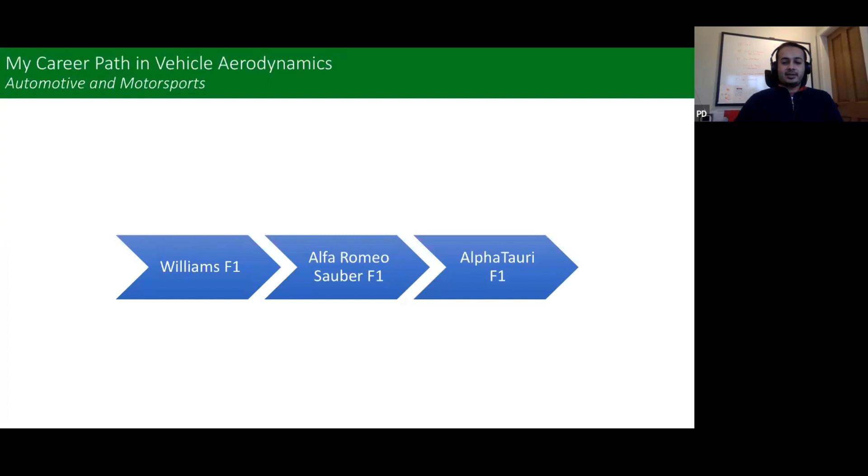That was one of the things we said we'd do. So my career path - I've spent about 10 years in Formula One, specifically at Williams, Alfa Romeo in Switzerland, and AlphaTauri in the UK. But before F1, I spent a good few years in the automotive industry. I worked at McLaren, at Williams Advanced Engineering, but my career really started at a CFD company called Exa in the US.

Just a little anecdote: none of this would have happened if not for a bit of a lucky break. As a lot of students find themselves in this situation, I finished my master's in the US and was looking for a job. Visa sponsorship is an issue everywhere, and under pressure to find a job, I almost accepted a job from a pump manufacturing company. So that's the road I would have gone down.

But the day before I accepted that job, Exa, a CFD software company, called me. They said, we'd like to interview you. I said, I'm just about to accept a job. They said, well, if you haven't signed anything, just come tomorrow. So they flew me out to Boston, interviewed me all day, and in the evening the hiring manager said, don't accept that offer, we'll send you an offer. That was my sliding doors moment.

It opened the door to this kind of career, which you see on the screen. It could have been something quite different. So I'm forever grateful to my mentor at Exa, who gave me my first job. I learned a lot there - it was a CFD company where I started off. I'll show you a few things at various points in my career.

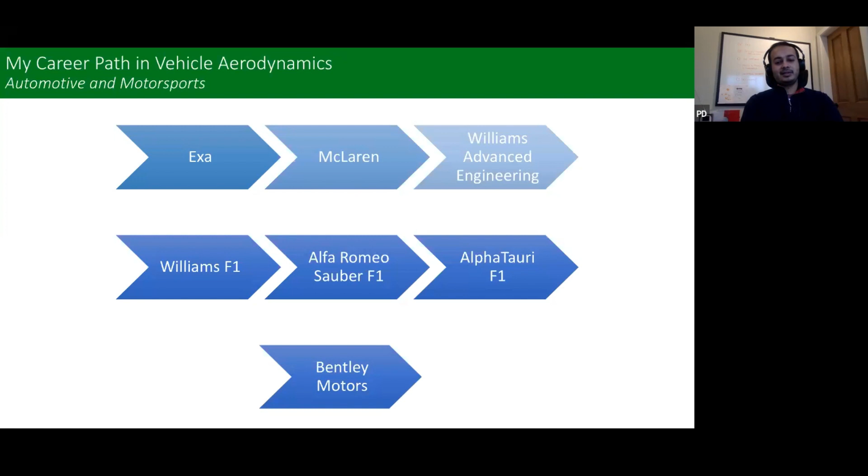Just looking at a few interesting things throughout my career. When I was at the CFD company, I was very luckily sent to work on NASCAR. I used to go down to North Carolina - we worked with the Toyota Camry at the time, and I helped develop their 2007 car. That was my introduction to motorsports. It was an interesting life, NASCAR, being with the team in North Carolina, and it gave me a bit of an appetizer - being in the wind tunnel there, being at the racetrack, and seeing how the world of motorsports worked.

And then I went to Williams Advanced Engineering, worked on a Jaguar C-X75. Williams Advanced Engineering was contracted to develop this car with Jaguar, and it was a very cool project because initially it was supposed to have tiny jet engines in the back. That was the concept, but it later was slightly watered down and became a hybrid car with very powerful motors and engines. But it was again a very nice car.

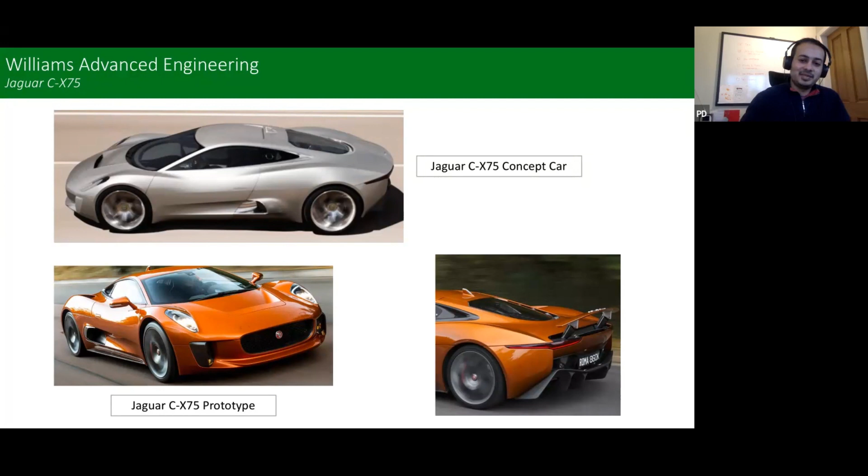It never made it into production, but it did have its 15 minutes of fame, playing the villain in a Bond movie. So the Jaguar C-X75 never saw production, but the prototypes were used in Spectre, in a chase scene in Rome. That's its 15 minutes of fame. If you look it up, you'll see a 4-minute chase sequence where the Jaguar C-X75 is driven by the villain, chasing James Bond in an Aston Martin.

But yeah, the moment that I talked about earlier, that I really wanted to get into F1, happened when I was at McLaren, and Lewis Hamilton won his first championship.

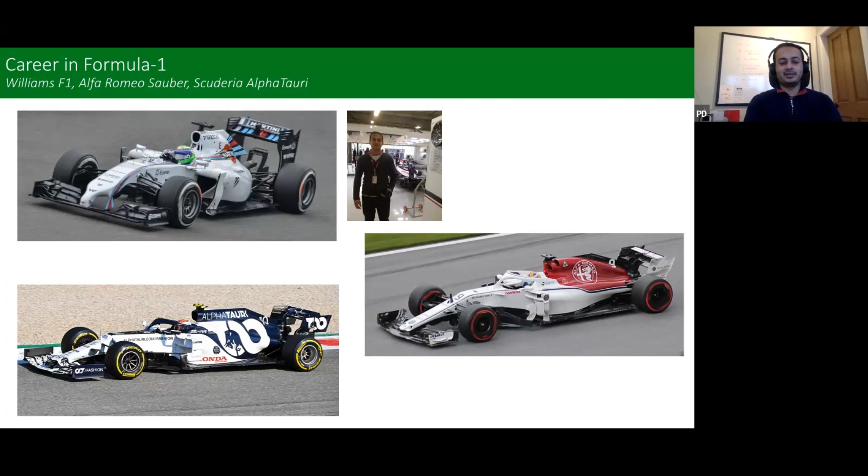That role was responsible for the development of the front of the car. After a couple of years there, I came back to the UK and worked at AlphaTauri. That was my F1 career before I moved out again, and now I'm back in automotive. I work at Bentley Motors now on those kind of cool cars.

Well, that's kind of laid the foundation as to who you are and what you've done, and I think we are all excited to hear about you demystifying how F1 teams, including me, to be honest, tend to simulate racetrack conditions in wind tunnels. So let's get into it.

I know you have 4 case studies to show. We'll go over these, and the methodology we'll focus on is looking at them from a very high level, because once we start talking aero, we just go on about it. We'll try to keep some time for questions, because I assume there'll be lots. So as you're preparing your questions, please try to refer to which particular case study you're asking about, depending on the 4 case studies. This way you also have to pay attention to what you're asking for. Let's jump into it.

As Shubham mentioned, we will reserve some time for your questions. I've seen hands popping up already, and maybe the career path is also interesting, you can ask questions about that too. It doesn't have to be only on the technical presentation. So just reserve that for towards the end, and we'll get into all of that.

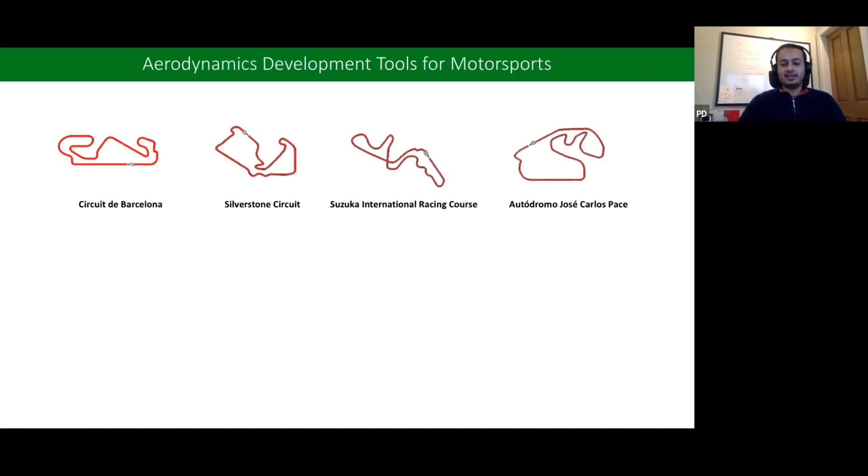So we'll talk about aerodynamics development tools that engineers have at their disposal to make the race car faster. I've just taken a few examples of race circuits, some of my favorites: Barcelona, Silverstone, Suzuka, and Brazil. It's just an example. What do we see? What's the common theme? You've got straights, you've got corners, and those corners are all taken at different speeds. Some are very slow, some are very high speed, and some are in between.

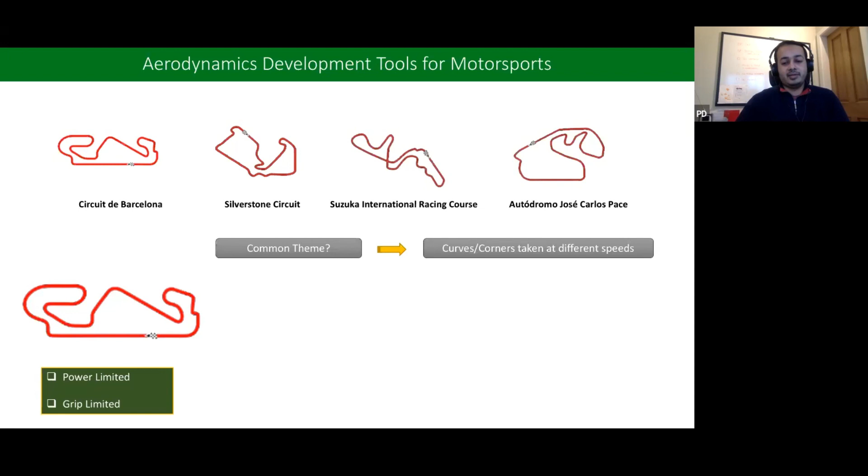So let's just isolate the Barcelona circuit. It's almost a reference circuit for all the teams. If the car does well there, that means it's a well-rounded car. You see parts of the circuit where the car is power limited, generally the straights. And you see the rest of the circuit where it's grip limited, meaning if you want to go faster, you need more grip. So the limitation is grip, and those are generally the corners.

So the grip limited parts of the track are the corners. The faster lap time is achieved by carrying more speed through corners, and what helps you achieve that is more grip through the tires. The more grip through the tires acting on the road, the more speed you can carry into and through the corner. And what gives you more grip? Aero gives you more grip, apart from all the tire characteristics. If you assume everything else is equal, aerodynamics and downforce will give you more grip acting on the tires, and that's how you carry more speed and achieve a faster lap time.

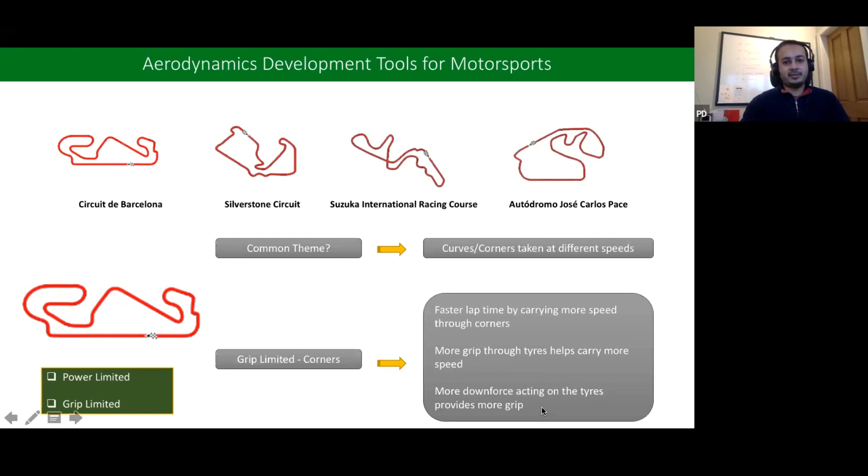Let's look at Silverstone, one of my very favorite tracks. It also throws up a really interesting race most of the time because of the weather in the UK. If you just look at this track, you can see all the different speed corners I was referring to - high speed corners, medium speed corners, low speed corners. They're all at different speeds that the car can take them at.

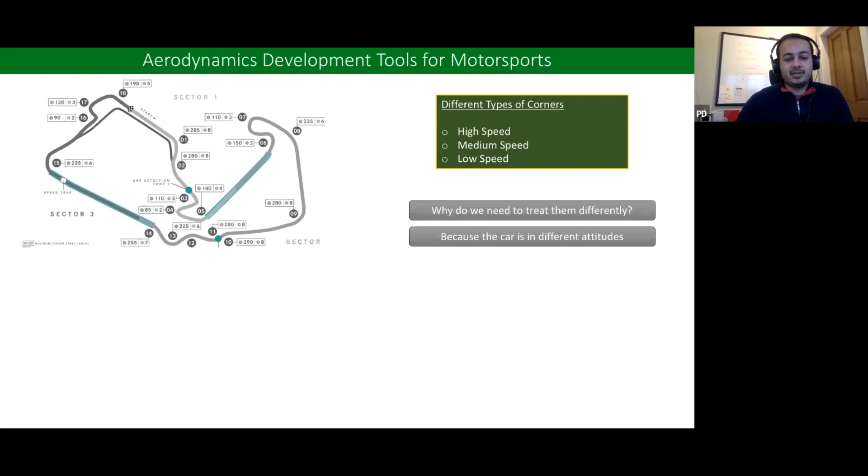Why do we need to treat all of these corners differently? It's because the car, as it goes through different speed corners, is in a different attitude because of the downforce acting on the car, the steering input demanded to navigate that corner, and also the ride height at that particular corner. So different speed corners put the car in a different attitude, which is why we need to treat them differently.

Let's quickly look at the British Grand Prix 2020 as a rough example. This is corner 9, a quite high speed corner.

That was a high speed corner, with drivers taking it at 300 kilometers per hour. Now let's look at a very low speed corner, corner 4, a tight one here. Silverstone's guideline speed for this corner is 85, but of course Formula 1 cars go faster. Verstappen is taking it at 118, and one of the slower ones was Latifi at 104.

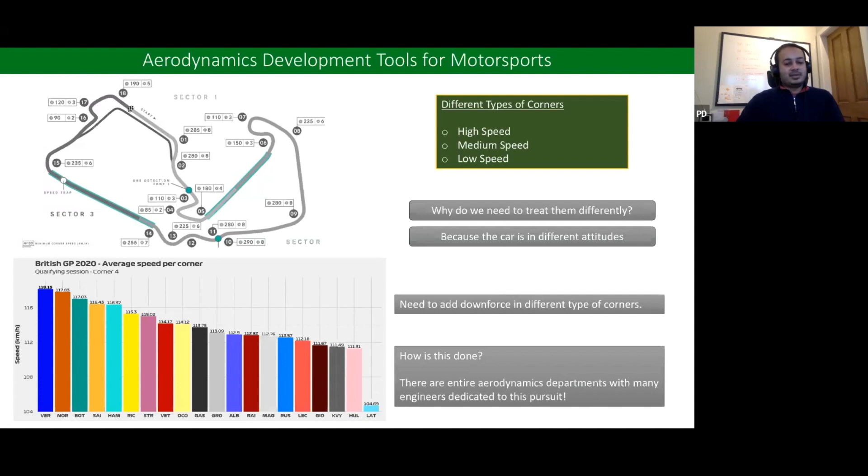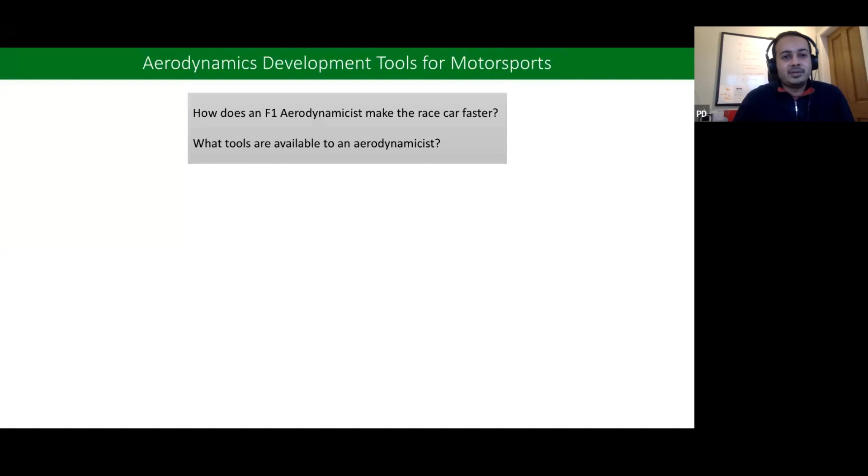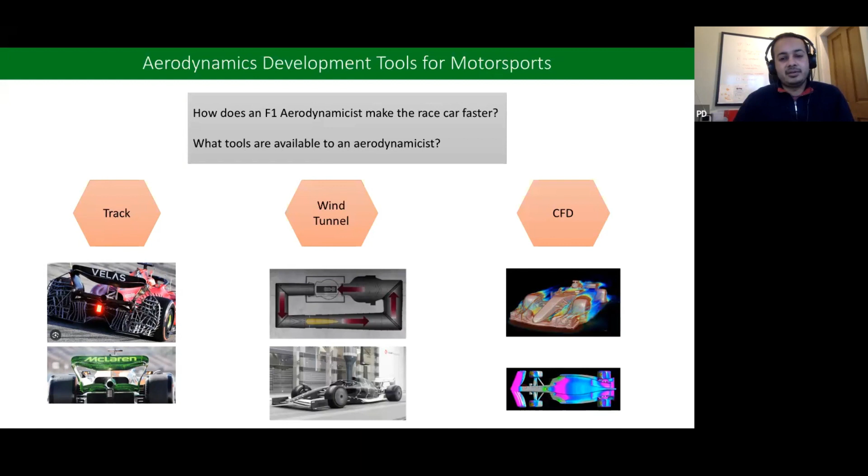So let's ask ourselves, how does an F1 aerodynamicist make the race car faster? What tools are available to an aerodynamics engineer? You've got the track, which in a sense is the ultimate tool because you're testing the real race car. You've got the wind tunnel, using a 60% scale model to test and develop the car. And then you've got CFD, a virtual environment where you simulate the car with software and develop it in that environment as well.

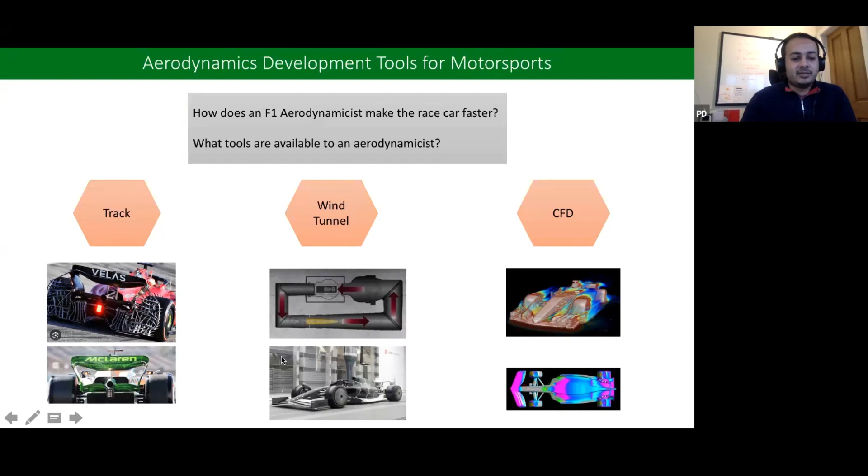What we'll focus on today is the wind tunnel and some aspects of it. But as we lead into it, we need to ask a few interesting questions. Let's start with the track. As I said, it's the ultimate tool to develop a car because you're testing the race car that will be racing on that track or on a different track. You've got the most realistic aspects, but it's very expensive.

It's heavily restricted in F1, as most of you know. It's very difficult to obtain force measurements because of all the noise with strain gauges and push rod loads, it's quite a difficult measurement to make. There's also variability of conditions, so you might test something in the morning and something in the evening, and the conditions have changed. So it's not very conducive to back-to-back testing when you're trying to improve the race car.

The driver is in the loop because you need somebody to drive the car around the track, and that can also cause variations in testing. It's very difficult to measure small improvements because of all these variations. So it might be the most realistic environment, but it's very difficult to develop a car experimentally in this environment.

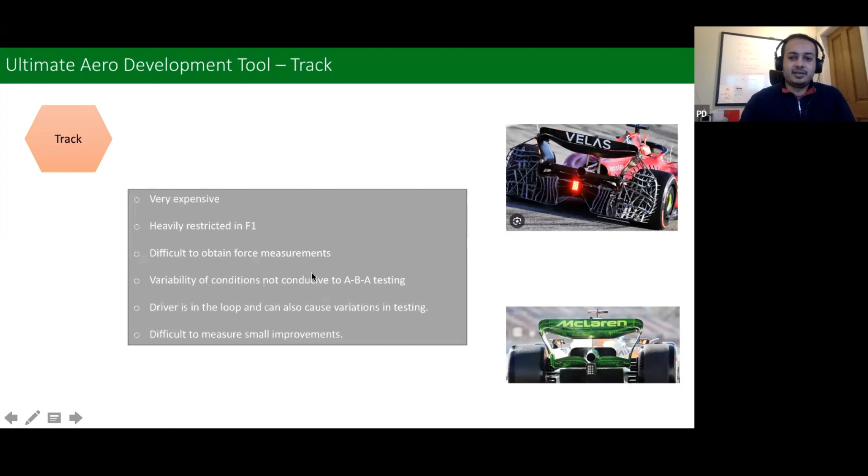So what do we do? We look at the wind tunnel. The wind tunnel is a very controlled testing environment, precise and very repeatable. Formula One teams spend a lot of money, time and effort to get their wind tunnels to be very repeatable, because all of the experimental accuracy depends on being able to repeat the model testing.

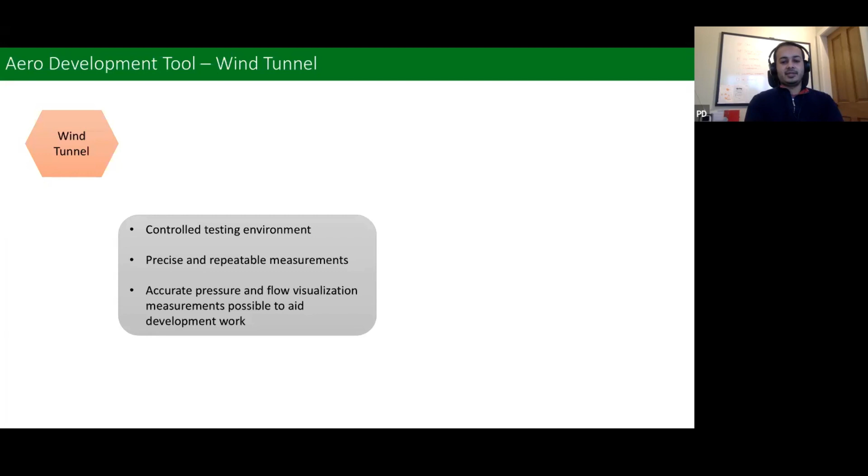You can get very accurate pressure and flow visualization measurements, and very good force measurements. A lot of the things that were difficult to do on a track become easier in a wind tunnel because of the controlled environment. But the car in the wind tunnel has to really closely replicate the car's behavior on track, because otherwise we're just not testing the right conditions, the right environment.

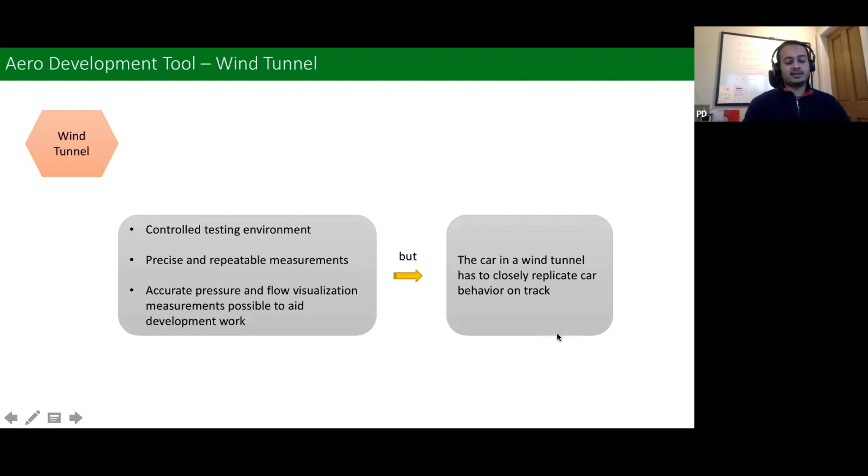This is where we'll spend our time today, talking about how Formula One teams go to extreme levels, or spend a lot of effort trying to replicate those track conditions in the wind tunnel, so that they can test and develop the car accurately.

Before we get technical, just thought I'd put this out here. Just ask myself, how many wind tunnels are capable of developing a modern F1 race car with all its efficient wind tunnel testing, model motion, and all the technology that's needed?

You can see there's a big bubble. Most F1 teams, as you'd expect, are in the UK - Mercedes, Williams, Alpine, Red Bull, McLaren, and AlphaTauri wind tunnels here. There's Sauber in Switzerland, a Toyota wind tunnel which some F1 teams were using until recently - that's very capable as well - and the Ferrari one in Italy.

There are a few other wind tunnels, and I might have missed some - Shubham might know a few more. There's the Dallara wind tunnel, capable of testing. There was a wind tunnel a Spanish team owned, Epsilon Euskadi - I think it was dismantled, unfortunately, due to financial problems, but that was capable of running a Formula One car as well. I've been fortunate and lucky enough to work in 4 of these wind tunnels - Williams, Sauber, AlphaTauri, and Red Bull.

Shubham, do you want to come in - do you know of any more? No, I don't know of any more.

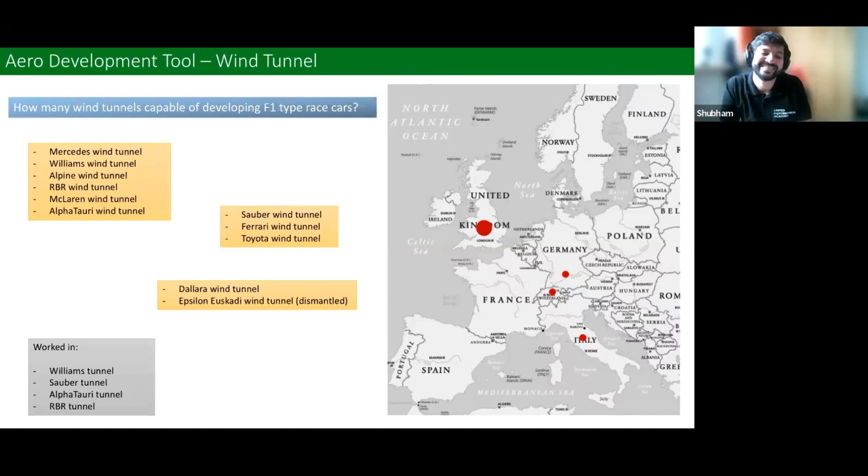Nah, not really - that's where Red Bull used bespoke techniques in order to replicate racetrack conditions. Yeah, that's what makes it more interesting. I think you can modify a lot of tunnels around the world to test a Formula One scale model, or even a full scale car in some cases, but doing it in such an efficient way to develop the car is challenging, along with all the technology - some of which we'll speak about in the next few slides - all very much developed by the teams.

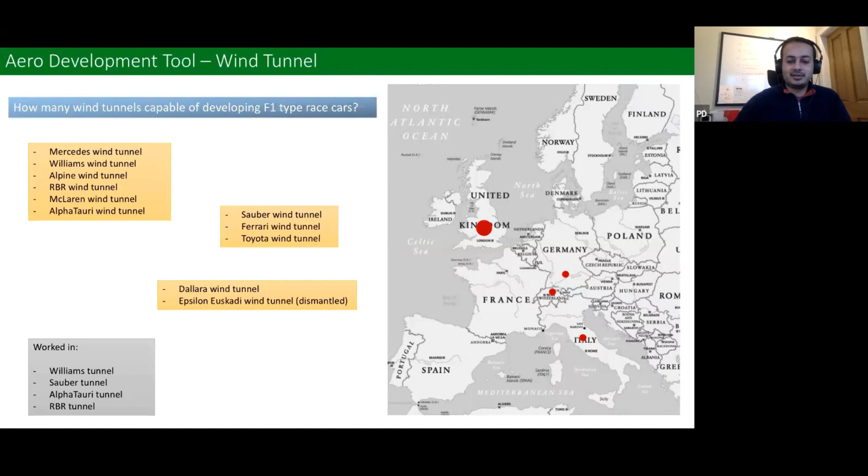Good, so let's take this image as an example - it's a Sauber wind tunnel. I've worked here, and it's the model - not a very recent one. I think this is the Formula One FOM model in the tunnel, and it's a good example to talk around. There's some technology in the wind tunnel that's almost standard in all F1 wind tunnels - there's the model motion, so you've got this thing that holds the model, and the balance connected to this, the force balance. It's a beautiful piece of equipment.

It can control the model in many different ways - it can change the roll, the steer of the wheels, the ride height independently, front and rear ride heights. Then the wind tunnel turntable can change the yaw angle. So the model motion can replicate whatever the car on the track will be doing.

And then you've got a fully articulated suspension, so very realistic suspensions. They're set up to be as close to the real race car as possible in terms of angles and everything, and that suspension allows the wheel to be fully articulated. We'll talk about that a bit more when we come to the tires.

There's a rolling road, which has a bit of texture to simulate road roughness. Again, we'll talk about it in more detail, why that's needed.

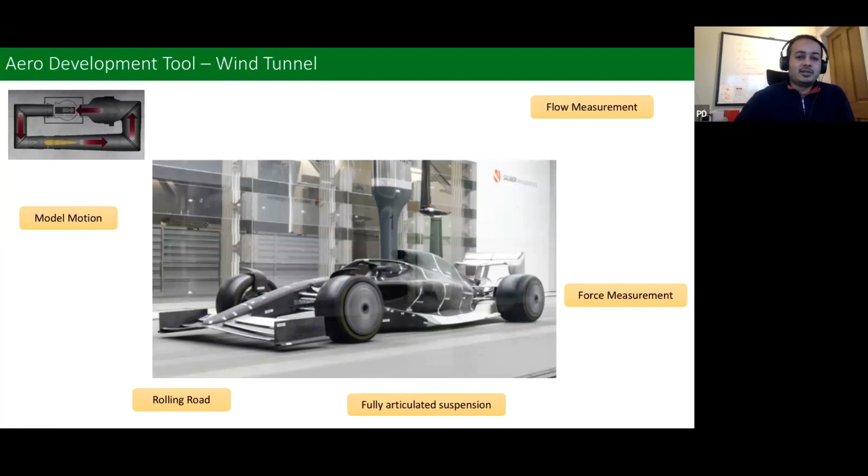It's flow measurement, which in a very controlled environment you can do to your heart's content. You've got PIV in many wind tunnels. Sauber, I don't think they have PIV, but they do have this arm here, which you can see - that's the Cobra probe, which you can program to go anywhere around the car and measure the flow field in slices. So you can measure the total pressure and whatever components - if you measure the velocity components, you can derive vorticity and other interesting features that an aero engineer would want to look at.

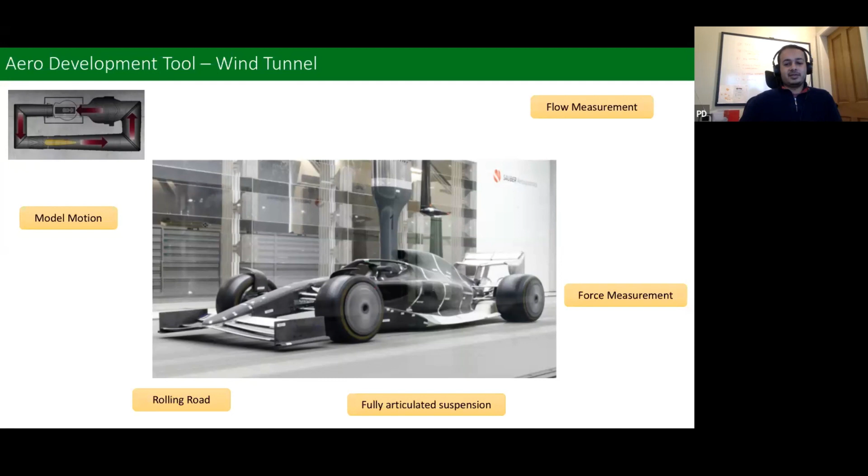So these are the standard things that most F1 teams will have, but there are lots of resources to understand all of this. Through UMA, Willem Toet has some very good videos describing all of this in detail. But what we'll do is go a step further and look at some details.

Before we go there, I just want to throw out a question to our audience: what materials do you think are used to make a Formula One scale model, a wind tunnel scale model? For example, the one shown in the image.

Okay, there's a lot of answers about rapid prototyped materials - plastics, a lot of them. So yeah, that's true. A lot of the model is made with 3D printed material, which is predominantly plastics, but the spine of the model is metal, because you need a solid base. Wings have a metal spine as well, because you need to replicate a bending motion, which I'll come to - there's also a reason they take incredible amounts of load. So the rigidity and strength required is one of the factors. There's also carbon, because carbon is very strong, very light, and when things get really small, you'd rather use carbon because it has the strength that 3D printed plastics don't give you. So those are the different materials that I know of.

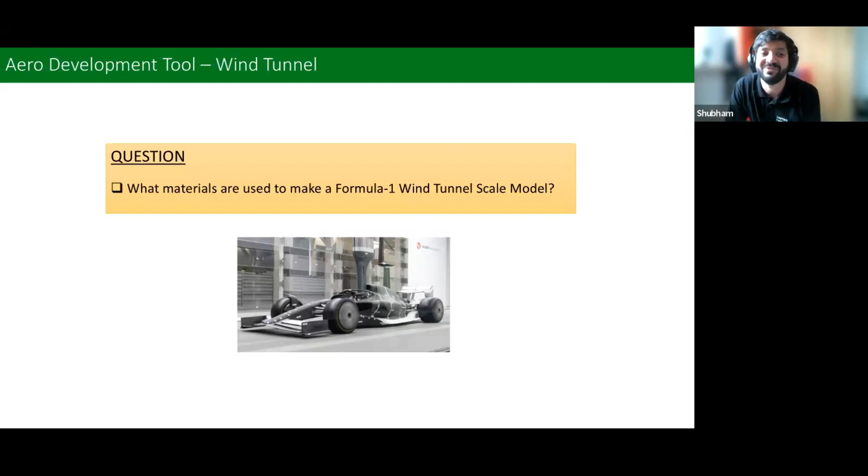And it's interesting, as you said, why the front wing needs to be of that material, because you'd expect - and this is a question probably for the audience, we should go into the next slide with this - if the front wing takes so much load, then why shouldn't we make it out of carbon fiber? Makes sense, right? But not really, and we'll find out.

So as I said, we won't talk about the standard things that we can see in a wind tunnel today. What I want to spend my time talking about is some of the more detailed aspects that teams try to do to replicate the track conditions. These are the four case studies that Shubham mentioned: front wing deformation, which we briefly spoke about, the rolling road belt and its roughness and why that's important, tire modeling, and some interesting aspects on the rear wing. So let's jump in straight away.

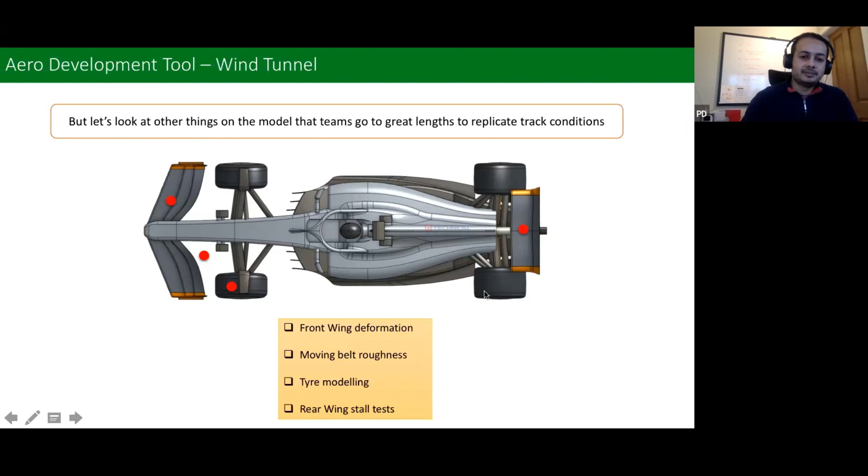And for one material I forgot, Shubham, is tape. Yeah, you can never have an F1 model without tape, I guess. However much you try, tape, yeah, and wax.

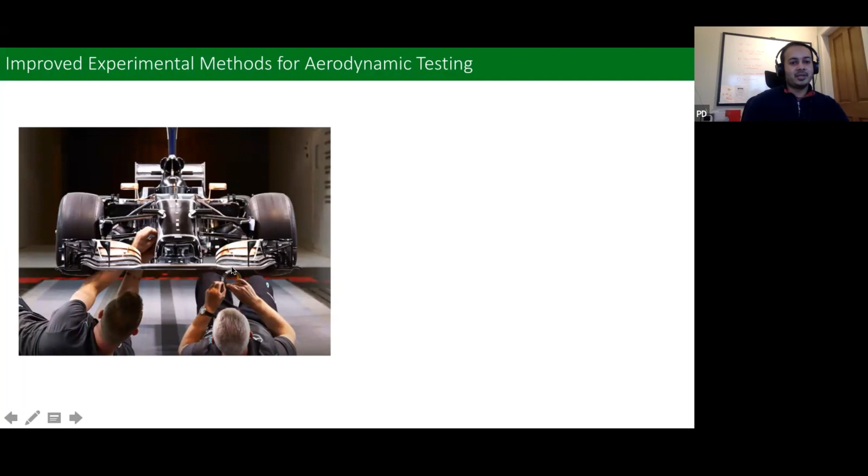So let's look at this front wing. What's happening here? It's supported in the center, but the rest of the wing is unsupported, so it's almost like a cantilever held in the middle. The loading of the front wing has a span-wise distribution, meaning the load in the y direction is not constant. There'll be a certain distribution of load, and that leads to a bit of deflection, especially in these old generation wings with all these winglets popping out in the outboard section. Loading here is very heavy and it's supported here, so there'll be a bit of bending on the front wing.

There is deflection of the nose relative to the chassis, and there's deflection of the wing relative to the nose. So there's two aspects of it, and that is a problem faced by the aero engineer in the wind tunnel. There's all of this deflection happening. Why is this important? Because the car on the racetrack sees this kind of deflection, and we need to replicate that if we're going to actually develop a front wing. That is the statement of the problem.

What happens when the front wing deflects? The wing starts bending towards the ground, towards the floor. Imagine if this model was running on the floor, it starts bending towards the floor. Downforce starts increasing up to a point, before you eventually stall the car if you bend it too much. Also, all of the aerodynamic flow structures associated with elements of the front wing start getting more loaded as it bends towards the floor. In some instances that statement may not be true, it might be the opposite, but the point is that it changes. That's why it's important to replicate this deflection in the wind tunnel.

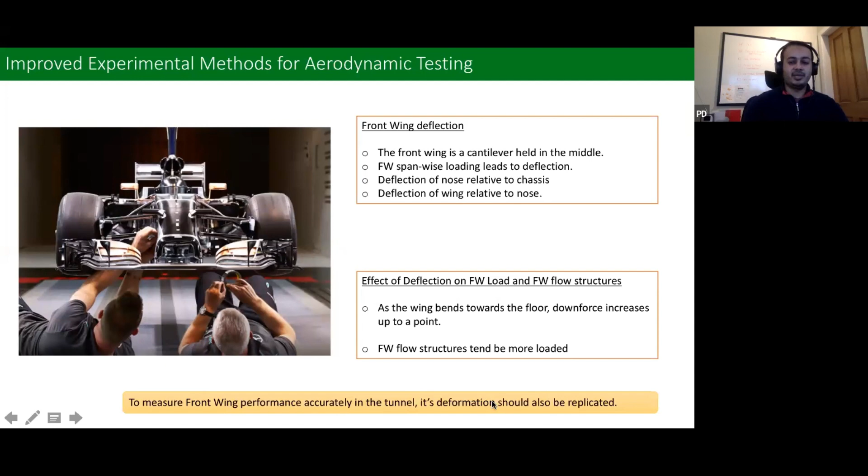So what do teams do? The statement is: if we want to measure front wing performance accurately in the wind tunnel, its deformation should really be replicated. So how do we do this?

We go back to the racetrack because that's the real environment. We collect data from the racetrack for nose and front wing deflection, done by putting laser measurement devices and markers on the front wing. You run the car with lasers to measure the deflections. You then validate your FE models from the track data, setting up an FEA model of the front wing and using your track data to correlate it. That FE model becomes the basis of what you then do in the smaller scale model, the 60% scale model. So now you know how the wing is behaving on the racetrack because you've measured everything and created your FEA model.

So now we need to replicate that in the wind tunnel at 60% scale. It's good that we've made our FEA model and correlated it, and we need a system in the wind tunnel to control this deflection. So what a lot of teams do is focus on the construction of the wing itself. The foundation of the wing is metal, so there's a bit of bending and cantilever action like a real wing, and the rest is controlled by a tether system.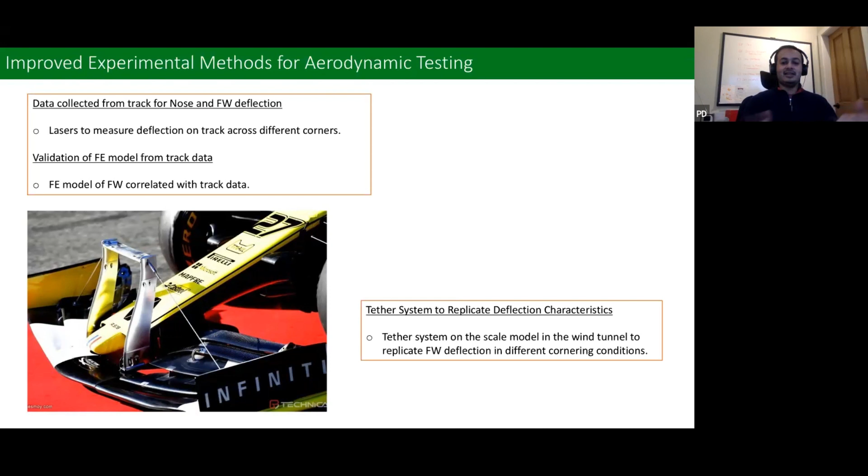It's an extremely complex model, and I always say it's an extremely complex experiment. Each run is an extremely complex experiment, and because of how efficient wind tunnel testing is, a lot of things are lost or hidden - they happen in the background. But they do happen. It's a very complex test experiment, and everything is taken care of to keep the baseline where it should be, and that should be perfect.

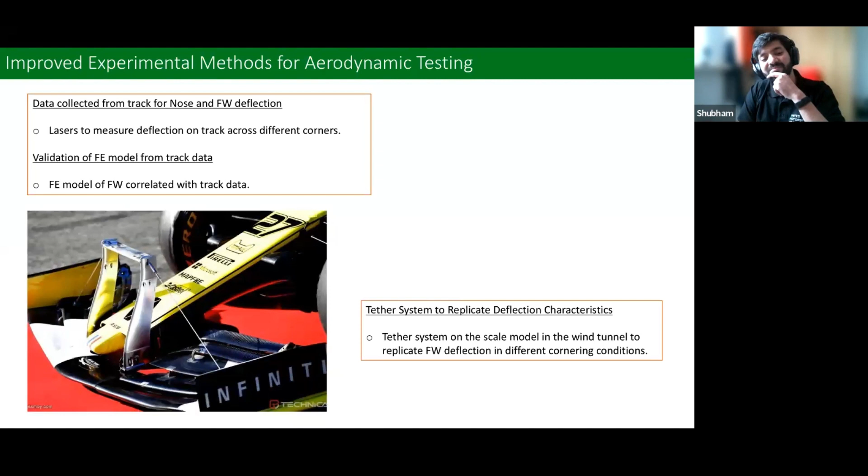So moving on - we were talking about this at a very high level, we could probably spend an hour just on the front wing deformation system, but we won't do that today. The second thing I want to touch upon is the belt, the rolling road, and the roughness I mentioned. This belt normally has a texture, a roughness, like the tarmac asphalt on a road. Why is that? Let's look at what's happening.

There's something called ground plane loss. There's highly accelerated flow under the front wing, between the front wing and the road, and boundary layer losses start building up in this region. In the previous generation of wings, before the new regulations, there were lots of vortices being formed as well, which would make things worse - they'd pick up this boundary layer loss and make it even bigger. If this boundary layer loss becomes big and travels down the wing, it acts as a blockage to the flow coming under the wing, and that's why it's important to get that right.

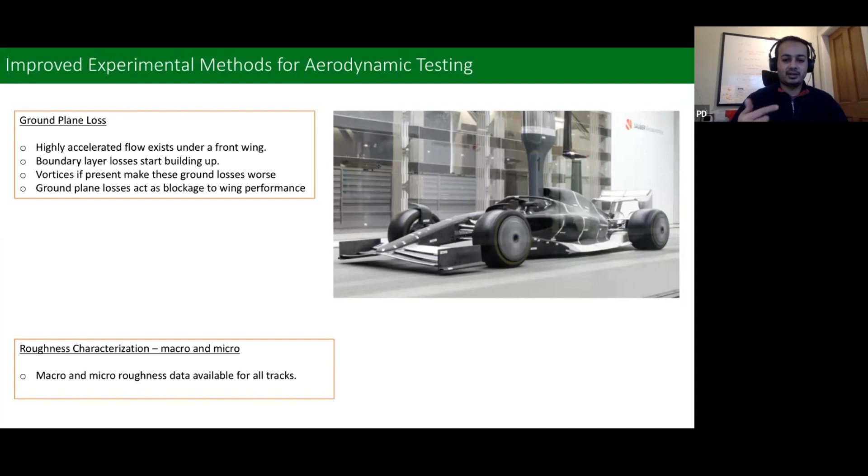But how do you then decide what you're going to do in the wind tunnel? One way, and maybe different teams do it differently, is to average across tracks, or choose a very representative track like Barcelona. The ones I've seen are mostly averaged across the whole season across different tracks, and you come up with the roughness characteristics of the road you want to try and replicate. That texture then becomes your baseline, what you want to replicate in the scale model.

Then you have an idea of what you're correlating your wind tunnel belt to. So you come back to the wind tunnel, use different surface roughness textures - you can get various roughness characteristics you can stick onto the rolling road - and a lot of testing is done to get the right roughness so you can correlate your losses to what you've observed from the racetrack. That's how I've seen this done, and it's quite important in the old regulations and the new ones, for different reasons.

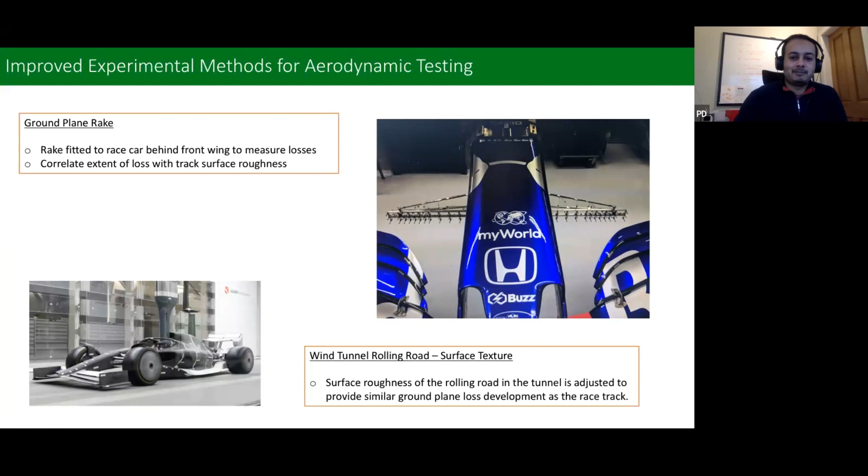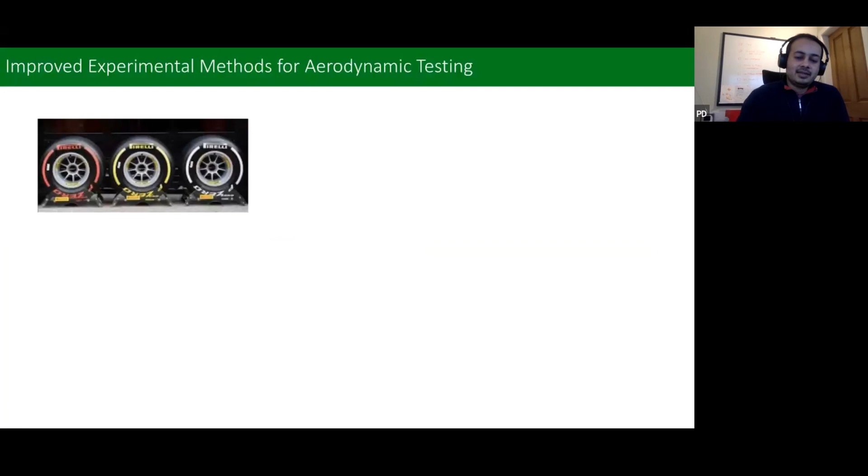Right, next topic would be tire modeling. So let's move on towards the tires. What is so important about tires that happens on a racetrack that we need to be really careful about when testing in the wind tunnel? First of all, why is tire modeling so important?

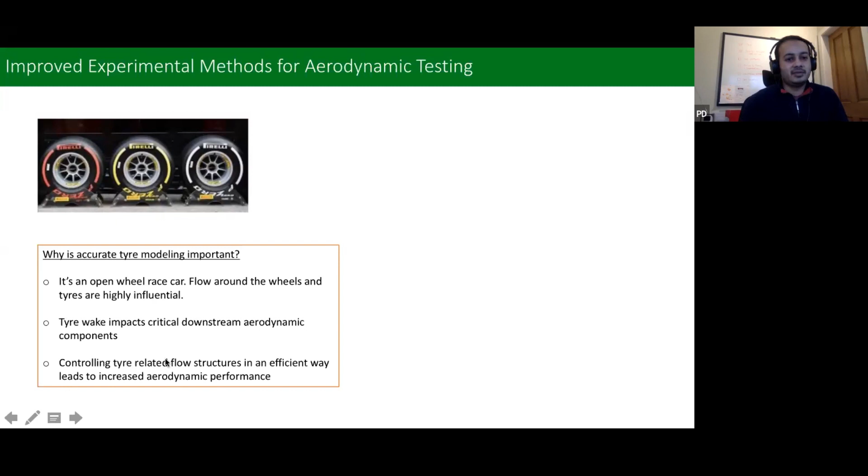It's an open wheel race car we're talking about, so the tires are exposed to flow, and everything that happens around it is very important. The vortices sent towards the tire, the flow separation around the tire, the wake shape - everything is important because it impacts critical downstream components you're trying to improve. So that front tire wake, for example, impacts the rest of the car depending on how it behaves. That's why it's very important - we need to control tire related flow structures efficiently because we can gain lots of performance if it's done the right way. That's why it's key.

One of the other very important aspects that you don't see: in this image, you see how exposed the tire is on a race car, and how important the wheel wake is, the vortices that are sent around the car.

Another very important aspect is where the tire touches the floor. There's something called tire squish or squirt - different teams call it different things - but it's basically where the tire contacts the floor. There's a contact patch, and the flow around that behaves quite differently because it's a very squeezed region, and you get a lot of losses that squirt inboard from the inboard corner that affect the rest of the car.

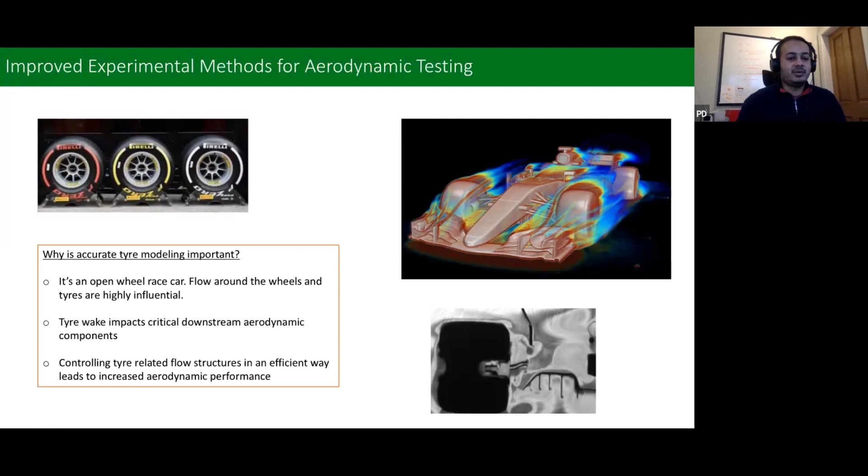This, for example, is just an image showing the tire squirting into the rear diffuser in the old regulations. So these are the reasons why tire modeling is important. We need to get tire modeling correct - we need to know how it's behaving on the racetrack, and we need to replicate that in the wind tunnel.

So what is the methodology? We have to replicate a full size tire on a 60% model tire. That's the challenge in front of us. And how do we do it?

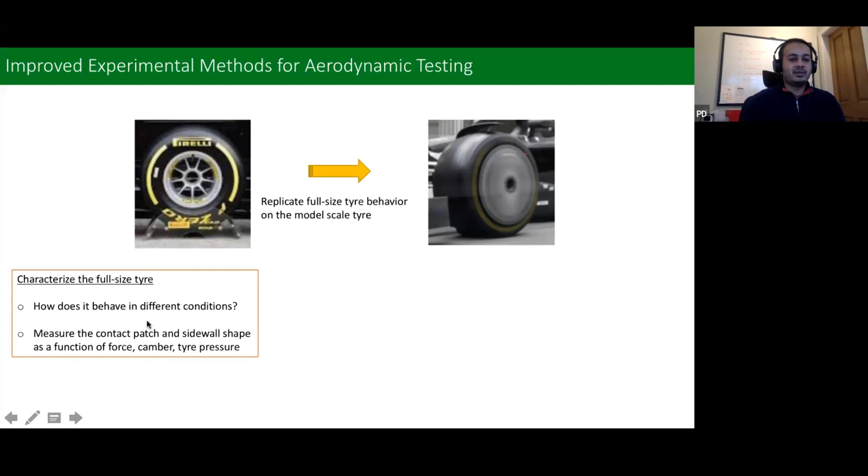We start by taking the full size tire and we characterize it. What I mean by that is we need to know how it behaves in different conditions. We need to measure the contact patch and the sidewall shape and how it changes when you change force, camber, tire pressure, and different variables. Once you know how these two things change with all of these variables, you know how the tire behaves on the racetrack in the full size tire.

Here's some of the ways to do it. You measure the contact patch on a static tire rig - we won't go into details, but there's simple technology with pressure mats and things like that. We can measure the contact patch, so you know how big or small it is as a function of downforce acting on the tire, as a function of camber, as a function of tire pressure. Then you can use lasers to measure the sidewall shape and how it changes.

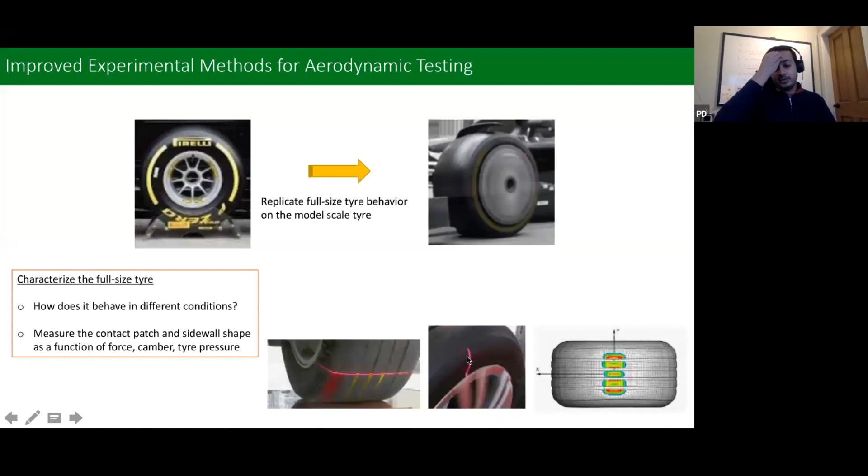An F1 tire gets deformed massively because of the huge forces acting on it, especially in high-speed cornering. You've got mechanical forces pulling the tire apart, you've got downforce pushing it down, and your sidewall deforms massively. So all of these are measured in this way - you can actually do laser measurements on the racetrack, which I've been involved in during one of my stints with a team.

Once you've done that, you know how the full size tire behaves, so then you can replicate that behavior in the wind tunnel on the smaller tire. But how is that done? It's not easy - you need a lot of technology to do that in the wind tunnel.

One of the technologies is to use active suspension. What that means is your suspension is able to control how much load is applied onto the tire so that you get the right deformation and the right contact patch shape. Another aspect is active tire pressure in the model, so you can control the tire pressure and hence control how the contact patch shape looks. These are two technologies I know of that are used to control the contact patch and the sidewall shape of the tire.

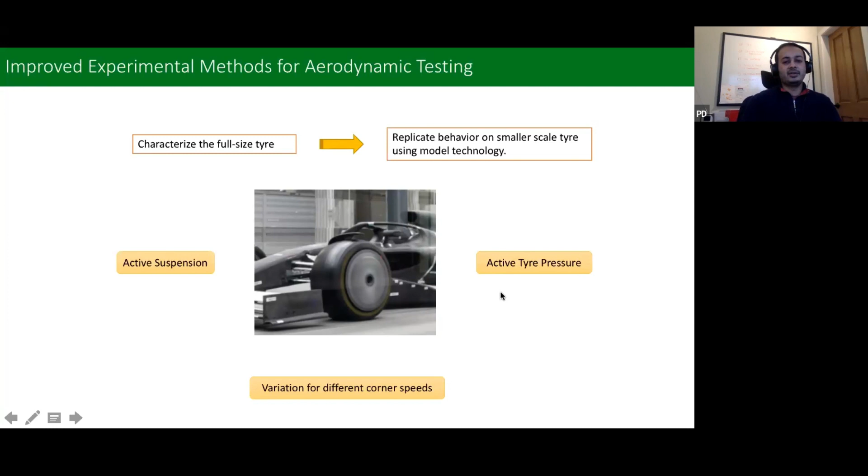All of this is done to replicate how the tire behaves on a racetrack for different corner speeds. The kind of deformation you see won't be the same for a high speed corner versus a low speed corner - they'll be different. So when testing different corner speeds in the wind tunnel, you need that to be changing, and that's why you have this technology to control how the tire is replicated at these different corner speeds.

I think there are other practices where you don't put a new tire onto the model. It's always done certain kilometers on a rig, to be able to control and track the baseline condition on how it's behaving. That's a very good point.

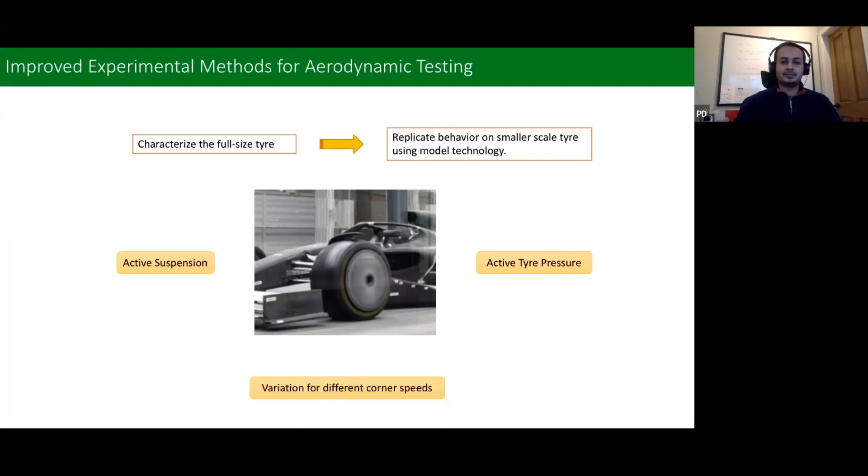Before we go to the last topic, I've got another question for you. Imagine a wet race where it's raining heavily. What aspects of car performance do you think are degraded the most when rain affects a race? Let's look at the chat. Anyone have suggestions? Grip, drag is increased, grip, cornering speeds. A lot of people saying grip. That's a good answer.

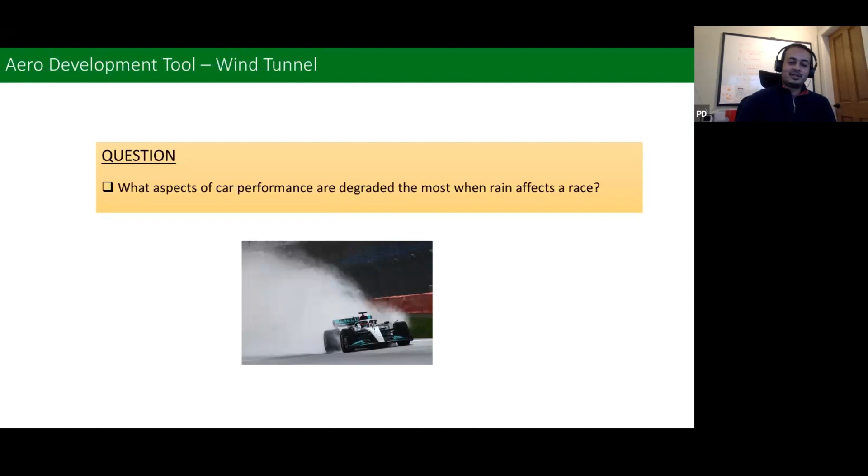Tire performance is massively degraded, as we all know. I think everybody speaks about it, it's a headline. But there are some other things happening in the background, which we'll get to. It was almost a leading question for me, because tire performance is a very dominant factor—tire temperature, etc. But let's look at some other things that may happen in rain.

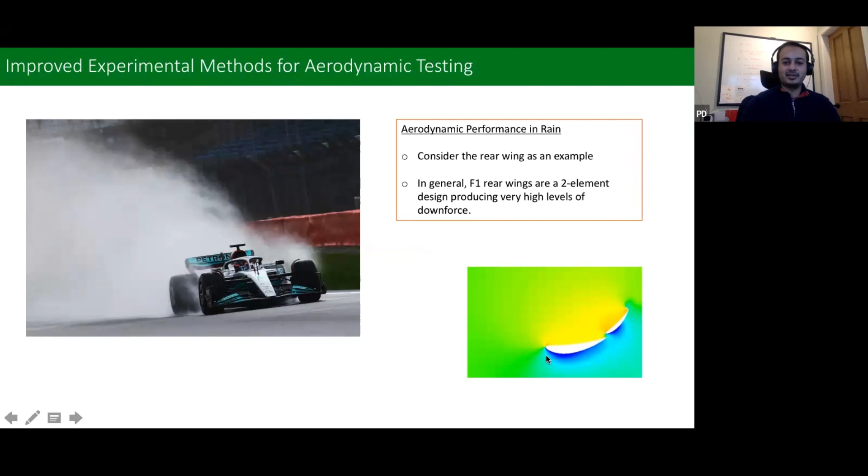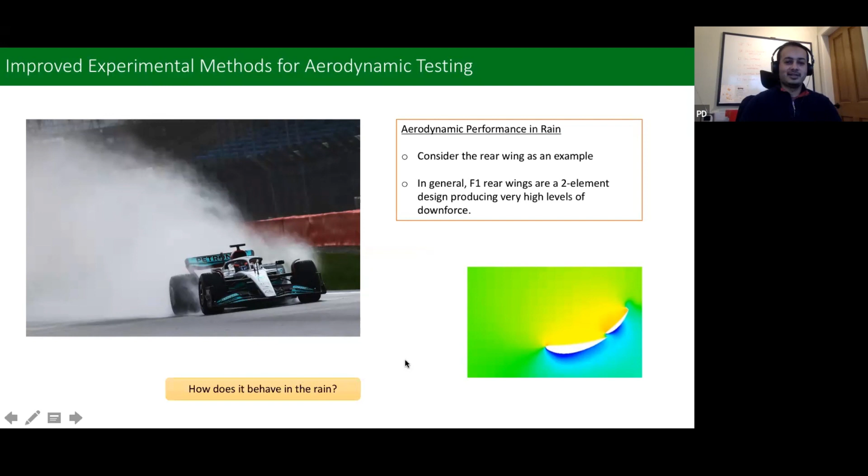Let's look at a rear wing. A Formula One rear wing is generally a two-element rear wing. It's highly loaded and produces a lot of downforce. When you put that rear wing in rain, what happens? Let's look at this image again. Imagine this rear wing in normal dry conditions, and then put the same rear wing in wet conditions, heavy rain. You've got lots of droplets impinging on the leading edge and reflecting off it, affecting the incoming angle of attack of the flow.

You've got a water film that forms on the suction side. Depending on how heavy the rain is, a film of water starts building up on the suction side and traveling up the wing, and that film can be quite thick in very heavy rain. What happens is that film of water changes the effective shape of the wing. You've designed this wing, but imagine adding a film of water with some thickness to it—now you don't know what the shape of the wing is anymore. It depends on the film of water.

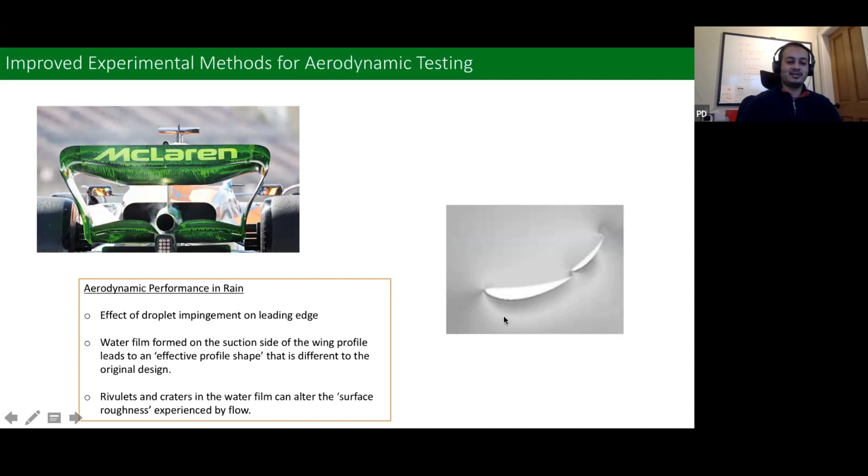There are also small rivulets and craters in the water film as the rain disperses and the water flows off the surface. What that does is alter the surface roughness the flow experiences, because the flow is no longer attached to the surface—it's flowing on the film of water, which has a different roughness characteristic. So it's completely changed the environment the wing is working in. That's the interesting thing. This is something that happens on the racetrack. So how can we then replicate this in the wind tunnel?

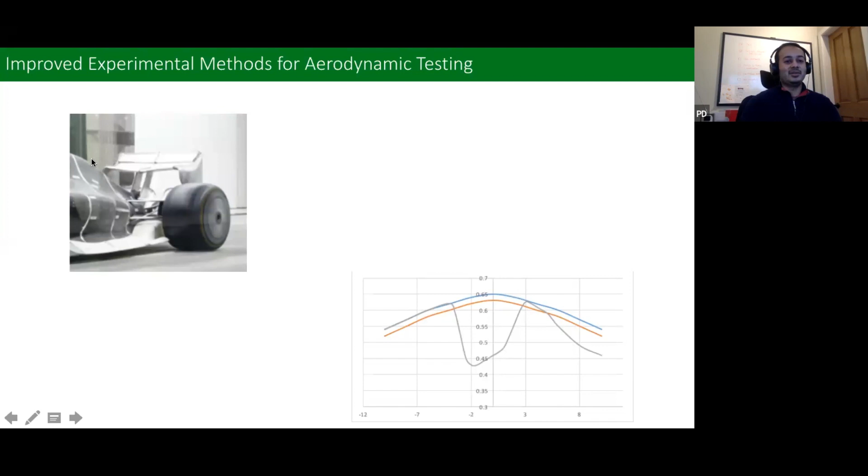Some teams literally make it rain in the wind tunnel on the rear wing. You've got a grid of spray nozzles, a rake of finely tuned nozzle diameter, because you need to tune the rain droplets and density to match a certain level of rain—an average level, not a hurricane. You'd hope you won't be racing in a hurricane, so you tune droplet density and size to work in an average rain condition, like we sometimes see in Japan, Suzuka, or Spa. That can be tuned using laser sheets just in front of the wing, taking measurements of droplet size and density.

Once you've got that grid and you're spraying water at your rear wing, it can then be tested at different conditions, because the rear wing obviously isn't performing just in a straight line—it has to perform in all kinds of car positions and attitudes. So you test it at different pitch angles and yaw angles to understand its behavior in rain.

As a rough example, this is just made-up data. Imagine you have a baseline rear wing design, and this plot shows rear wing downforce on the y-axis and yaw angle on the x-axis—so you're doing a yaw sweep of the rear wing. Imagine your baseline wing is the orange one. You design a really good rear wing with even more downforce, the blue one, which works perfectly in dry conditions. But as you spray rain and go through different yaw conditions, you'll start seeing drop-offs because flow is separating due to the characteristics I mentioned previously. This is what teams have to be wary about when designing wing profiles—it has to work in all conditions, and rain is one of those extreme conditions you see on the racetrack.

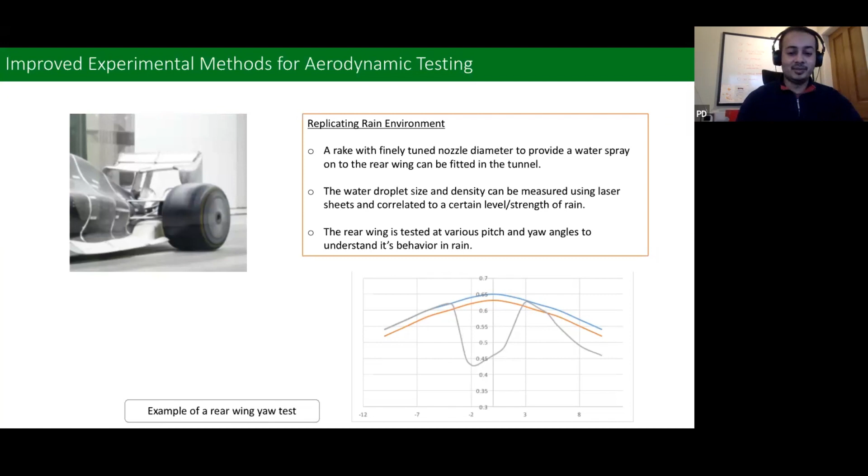One thing to add on this is that I don't think every team does this because there are different philosophies. I believe Red Bull never really pushed rear wing performance to the top level because they didn't need it—they always had something in hand in terms of tuning the rear wing performance, so you didn't need to be right at the edge. What happens is when you have a rear wing right at the edge, any conditions that alter on the racetrack could put you in trouble. So it really depends on the philosophy. If there's confidence that there's margin and headroom in your design, then you may not be too worried about stress testing.

Just to wrap up, as an aerodynamicist, you've made sure that your scale model is behaving in a similar manner to the full-scale race car on the track. You've done all of these things that we talked about and more to replicate racetrack conditions in the wind tunnel. How do you then make the car faster? So when the car is cornering, various parameters are changing—steer, roll, yaw, ride height, they're all changing. How do you add downforce effectively?

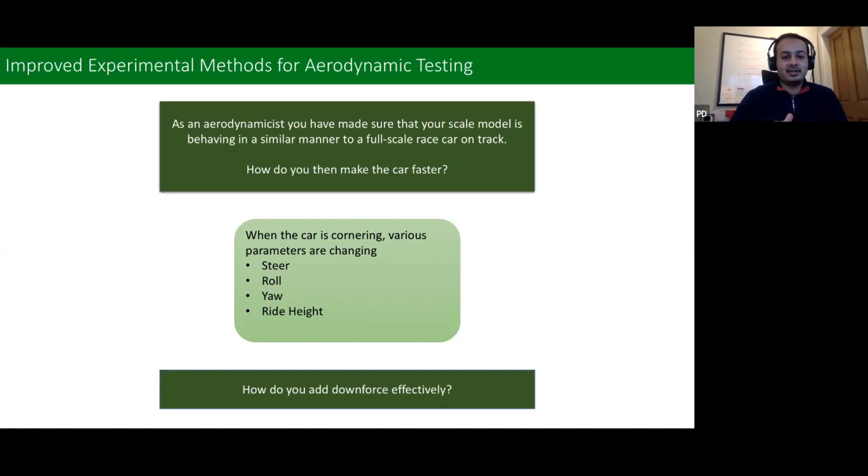You do that by mapping the aerodynamic performance of the car through various parts of its dynamic envelope. The car has a dynamic envelope in which it operates, so you need to test whatever performance you're trying to add across the entire envelope. That's called mapping the car performance in different attitudes. The way it's done is you map it in different corners—low speed corners, medium speed corners, high speed corners—and why is that? Because the car is in different attitudes in these corners. You also map it in various parts of the corner itself.

Just take one high speed corner—the car is in different conditions as it goes through the corner itself. You've got turn in, slight braking and turn in, you're pitching forward, then you hit the apex, and then you've got the exit conditions. So the car attitude is constantly changing as it goes through the corner. Not only do we need to look at different speed corners, but even within the corner there are different ways the car positions itself.

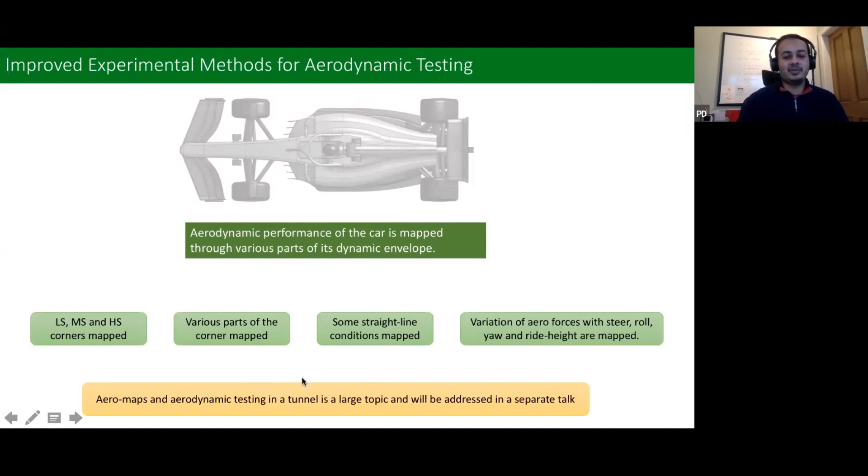Then we also map some straight line conditions because they are important to track, and also for some other conditions, which we can talk about in a more detailed manner some other time. Then you also look at variation of all the aero forces with different parameters like steer, roll, yaw, and ride height—they're also mapped. This is the way you develop the performance of the car. You do all this on your baseline car, then you design something new, put it on the car, and do all this again, and then you come out with something to evaluate whether it's better or not. This is a very complex topic, aero mapping—it's something for another time, and hopefully we will talk about this in the future.